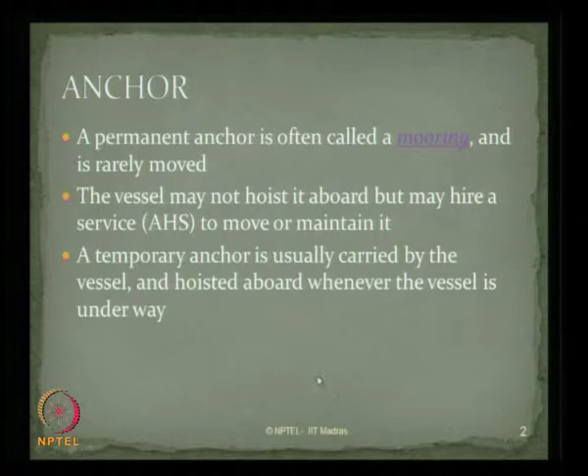First, what is an anchor? A permanent anchor is often called a mooring and is rarely moved, it is more or less fixed to a specific position. The vessel may not hoist it aboard, but may hire a service to move or maintain it. A temporary anchor is usually carried by the vessel and hoisted aboard whenever the vessel is underway. This is what most non-sailors mean when they refer to an anchor.

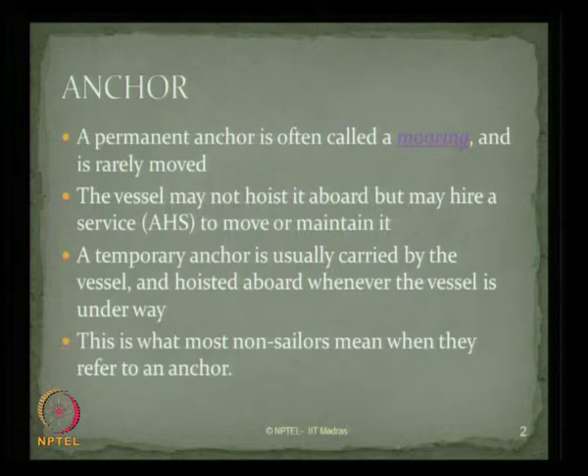Where are these anchors used? Anchors are used in water depths exceeding 1500 meters.

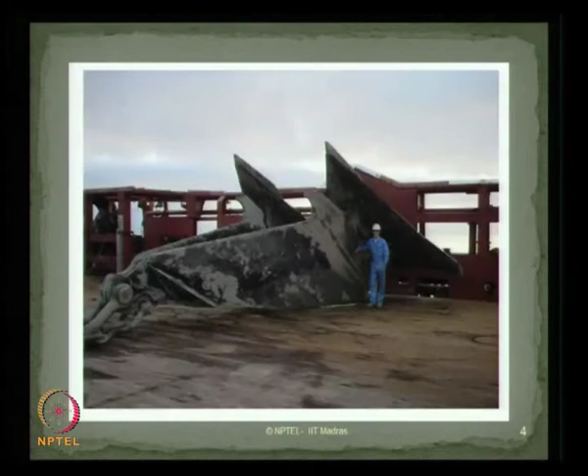This is a typical photograph of an anchor. It shows the proportionate size in terms of dimension, length, thickness and material compared to a human figure. You can see an anchor is a very large structural component which holds down the vessel in position as a restraint.

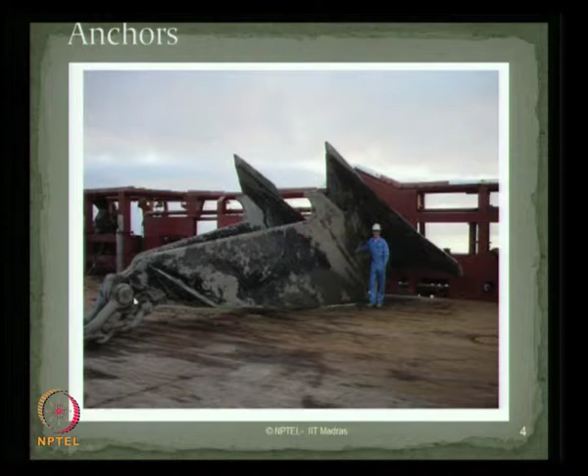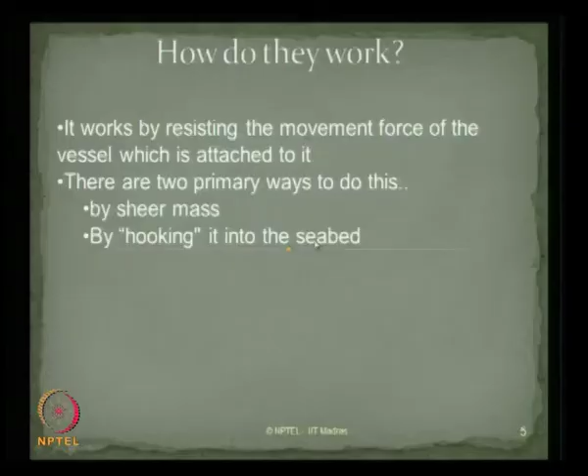How do they work? It works by resisting the movement forces of the vessel to which it is attached. There are two primary ways to do this. One is by having a sheer mass, a massive element which can hold down the vessel in position. By increasing the mass of an anchor, it may not allow the vessel to move. The second option is to hook it down to the seabed by some arrangement, holding it down by hooking it, or creating a massive attachment to the bottom such that the vessel does not move.

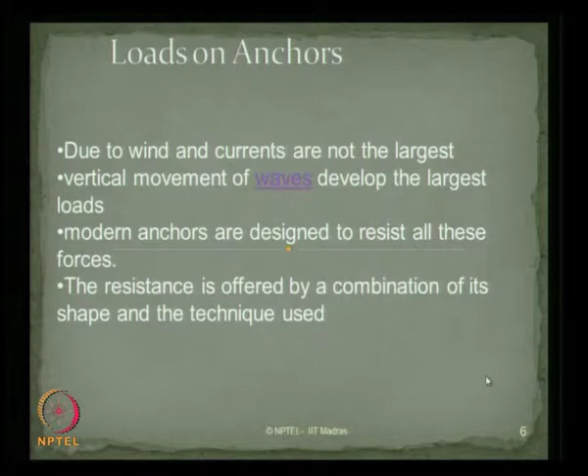What are the different kinds of loads coming on anchors? Due to winds and currents, the forces coming on anchors are not the largest. The vertical movements of waves develop the largest loads possible on anchors. Modern anchors are designed to resist all these forces. The resistance offered by an anchor is essentially a combination of the shape and the technique used to anchor it to the seabed.

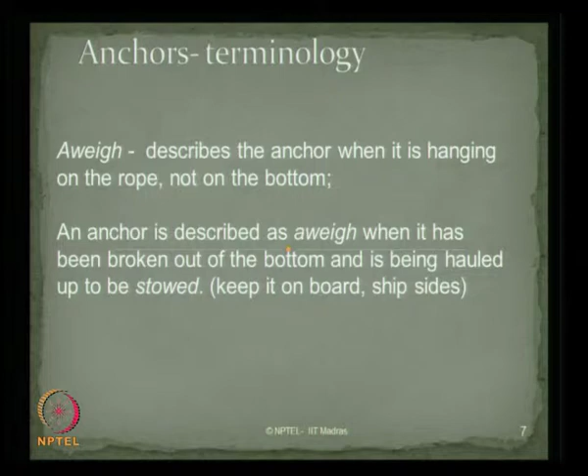There are different terminologies used for seabed anchors. 'Aweigh' is one of the important terms commonly referred to. Aweigh describes the anchor when it is hanging on a rope and not on the bottom. An anchor is described as aweigh when it has been broken out of the bottom and is being hauled up to the stowed area, so it can be kept on board on the sides of the ship.

Two photographs show different views of an anchor which are essentially temporary anchors. These are called fluke style anchors, one of the temporary types generally used. A central bar is called the shank. An armature with two large flat surfaces is called the flukes. So this type of anchor is what we call a fluke style anchor.

The flukes have a sharp tip at the end, so that they can penetrate down into the seabed for holding it in position. The shank is attached to the fluke by means of a hinged arrangement, and this point is called the crown, where the shank and the armature are attached together. The stock at the crown is hinged so the flukes can move or rotate, allowing it to be positioned for anchoring the object it is connected to. This shank is connected to the object by means of a steel chain or a wire.

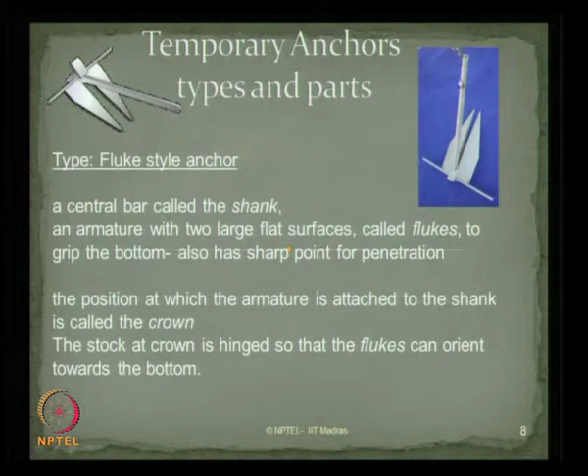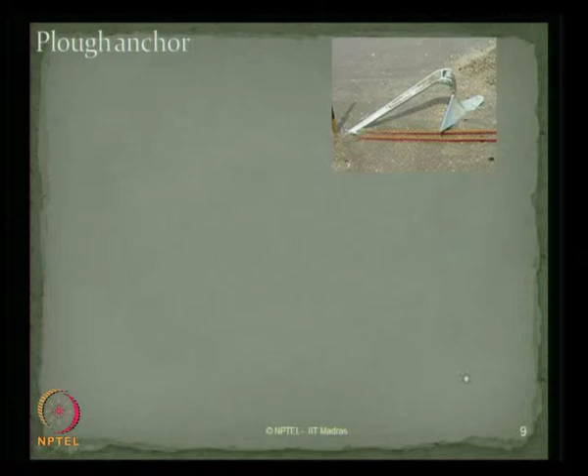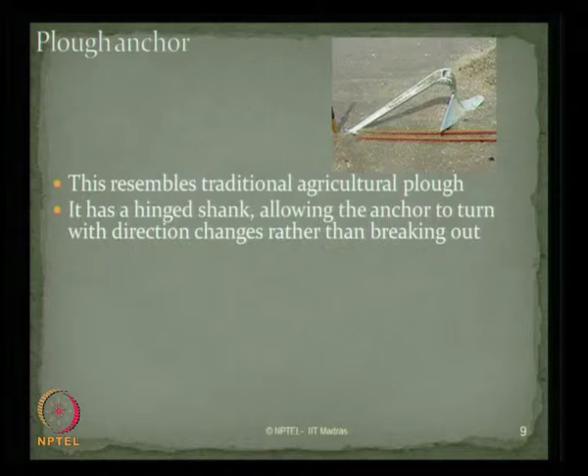The other type of anchor is called a plough anchor, as seen in this photograph. It is typically similar to the plough used in agricultural fields, resembling a traditional agricultural plough. It also has a hinged shank, allowing the anchor to turn with direction changes rather than breaking when the direction is changed. The hinge enables the plough component to turn its direction and position when the anchor is being used for holding it in position.

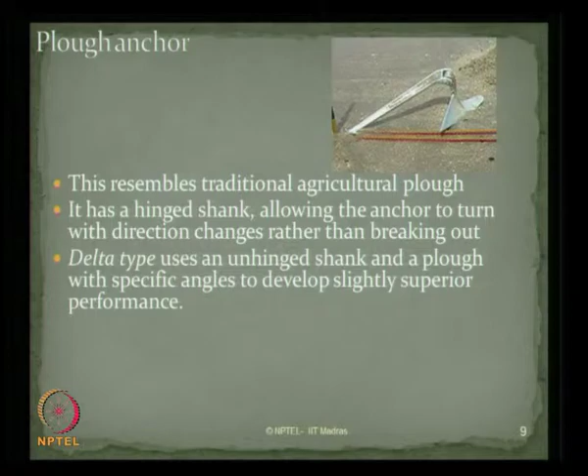The delta type uses an unhinged shank. Sometimes unhinged shanks are available with a plough manufactured at a specific angle, and there is no hinge, because there is always a probability of the anchor breaking exactly at the hinged point, which is the weakest connection in a given anchor. Owing to the use of lead or tip weight, the plough is heavier than average for the amount of resistance developed. The plough has a very massive element which can hold the shank at a specific location and cannot be pulled out easily when placed in position.

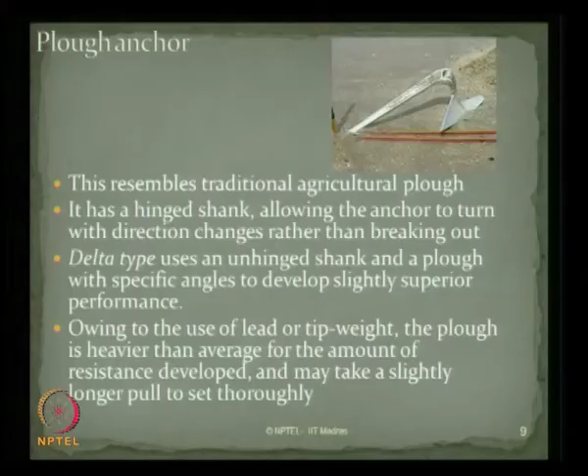The next type of anchor you see in the picture is the Bruce and claw type. You can see this is the claw and this is the Bruce. So, Bruce and claw type.

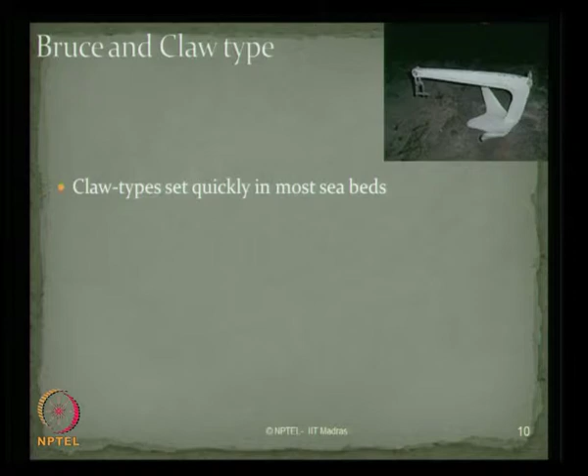Claw types set quickly in most seabeds because of their geometric arrangement. This is one of the convenient ways of holding down the object in position. They do not break with tides or wind changes; they slowly turn at the bottom to align with the forces.

Claw types have difficulty in penetrating because the sharp edge is not the same as that of a plough type, so this has certain difficulty penetrating the seabed, but of course it holds rigidly in position and can be suitably used for many types of sea bottom.

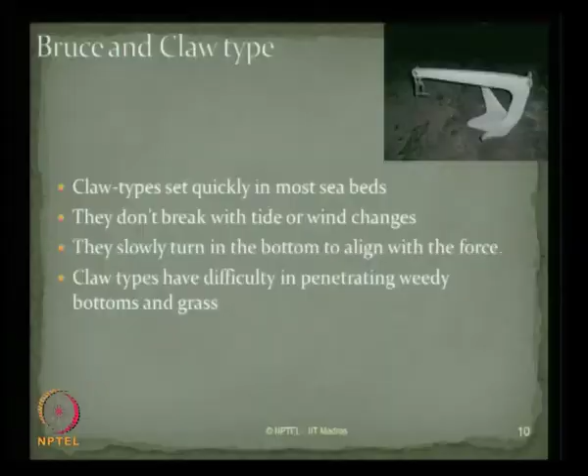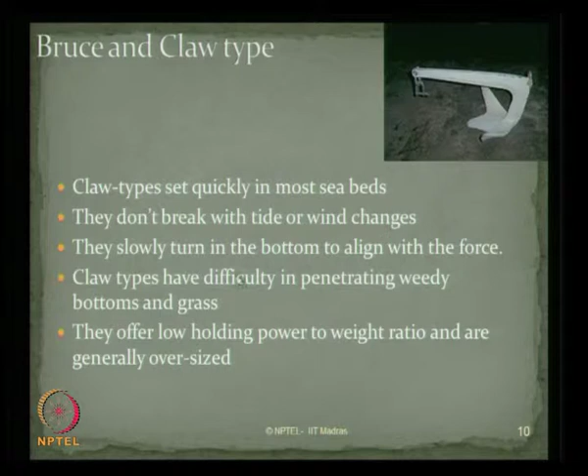Essentially, when you have large or intensive vegetation in the sea bottom, this kind of anchor can be conveniently used. Bruce and claw type is that kind of anchor we talk about. They offer low holding power - the holding power or pulling capacity of this anchor compared to its weight is lower, and therefore they are generally oversized.

The other type you see here is permanent anchors. What you saw in the previous slides were all temporary anchors. The ones you see now are all permanent anchors.

The first of its kind is what we call mushroom anchors. It is shaped like an inverted umbrella or a mushroom. The head is buried in the silt to hold the vessel in a permanent position. It is suitable for seabeds composed of silt or fine sand.

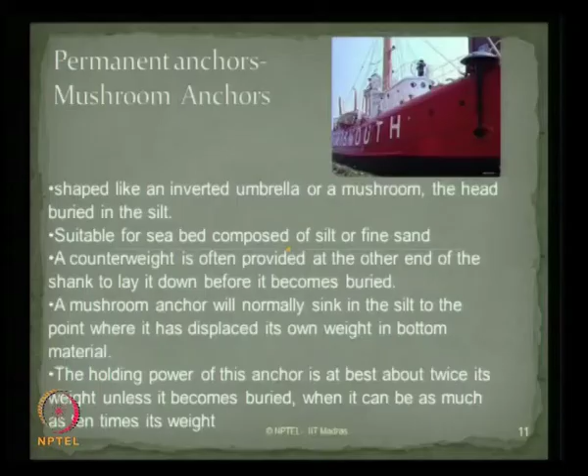There are other kinds of anchors called dead weight anchors. They rely solely on their heavy weight. It is usually just like a large block of concrete or a huge massive stone.

Its holding power is equal to its weight underwater, taking buoyancy into account, regardless of the type of seabed. It can be used in any kind of seabed surface, whether rough, with vegetation, etc. Consequently, dead weight anchors are used where mushroom anchors are not suitable.

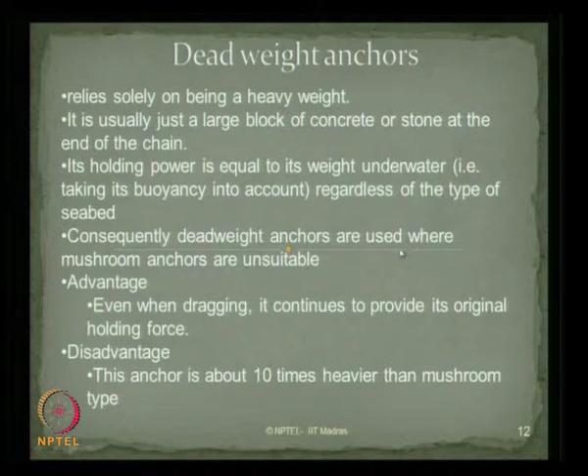There are salient advantages of this kind of anchor. Even when dragging, it continues to provide its original holding force - that is an advantage. Whereas one important demerit is the anchor is about 10 times heavier than the mushroom type. So you are unnecessarily carrying this kind of heavily placed anchor on board, whereas mushroom type anchors can be an alternative to this, but of course mushroom type anchors cannot be suitable for all kinds of seabed surface.

When we talk about anchoring, let us ask 4 primary questions which we must consider before we select any specific type of anchoring. Is the anchorage protected? You must check whether the anchorage system you are using is completely protected from the lateral forces.

Is the seabed having good holding ground? Do you have a seabed made of silt, sand, enough vegetation, or rocky, etc.? Because depending upon the surface of the seabed, you must select the specific type of anchor.

Then of course you should consider what is the depth at which you are thinking of anchoring it, what is the tidal range, and what is the current tide state at that specific location, and whether there is enough room for variability of all these values during the anchoring process. So we must answer all these primary questions first before we select any specific type of anchor.

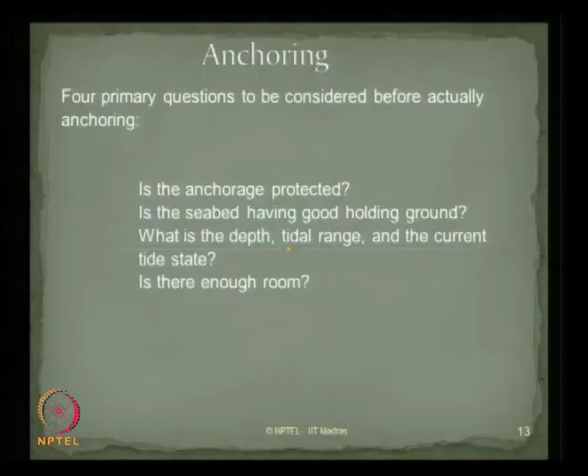Now let us elaborate these questions in detail. Is the anchorage protected? A good anchorage offers good protection from the current weather conditions and will also offer good protection from the expected weather conditions.

The second question to be elaborated is whether the seabed has good holding ground. It depends on the nature of the seabed. Collect a sample from the seabed bottom and examine it. What kind of material is it? Is it a rocky bottom? You must examine it physically as well as by taking samples, to see what kind of anchor is suitable for this kind of seabed.

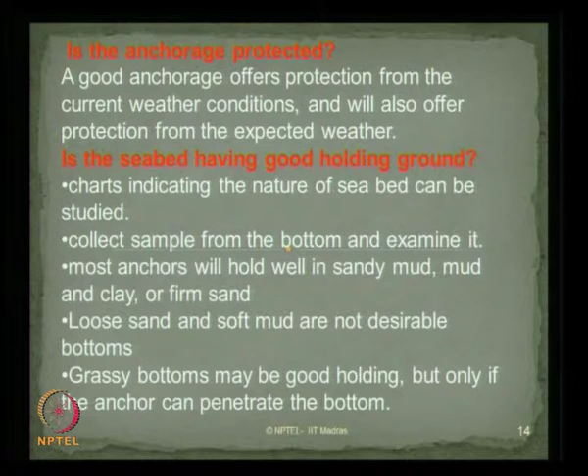Most anchors will hold well in sandy mud, clay or firm sand. Loose sand and soft mud are not desirable for many of them. If you have strong vegetation at the bottom, some types of anchors may have very good holding capacity, but only when the anchor can penetrate to a greater depth at the bottom.

The next question is, what is the depth at which you are planning to anchor? Consider the depth, the tidal range and the current state. If your anchorage is affected by tidal variation, you must know the tidal range and the times of high and low water tides at that specific site. You must also have a good idea of the enough depth available for a vessel and the draft at which your vessel should float throughout the range as it is being pushed and restrained by the anchors.

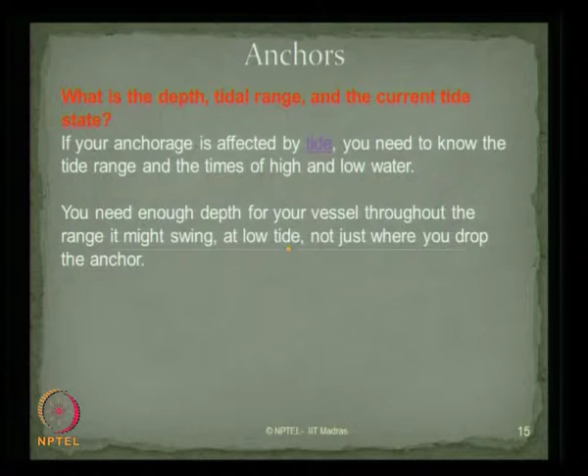We also talk about the different holding conditions for anchorage. Whatever the anchor type, optimum holding depends on several conditions. The foremost condition is that the flukes, the pointed edge blades, must be completely and symmetrically buried in the bottom.

If you do not have symmetric holding of the anchor, this may result in unnecessary lateral displacement of the vessel during high tide or low tide operations. Therefore you must ensure the flukes are held down symmetrically and completely penetrated in the sea bottom. The second condition is that if the fluke and the shank are hinged together, what we call articulation, then the articulation must be kept in an open position, so the angle of rotation of the fluke can adjust itself depending on the lateral forces acting on the anchor.

Another condition to examine when selecting an anchor is that the tension on the pulling eye of the shank must be more or less parallel to the seabed. Do not try to place the anchor so that the shank remains almost perpendicular to the seabed. This may result in very little holding power, and the anchor may get pulled off the seabed even for very small lateral forces.

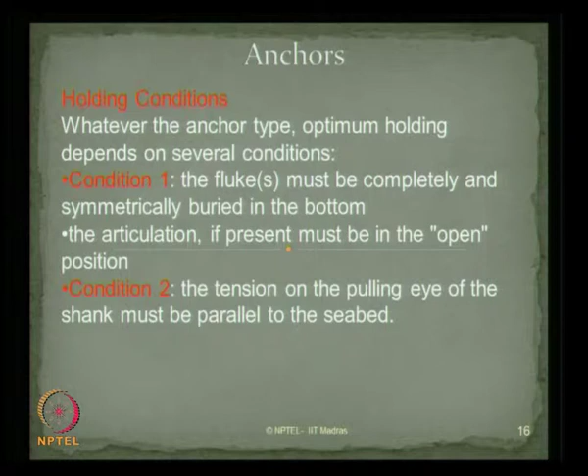Now let us see some pictures showing good settings and bad settings. As I told you, in the case of sand or silty clay etc., the shaft should be almost parallel to the seabed to ensure good holding power.

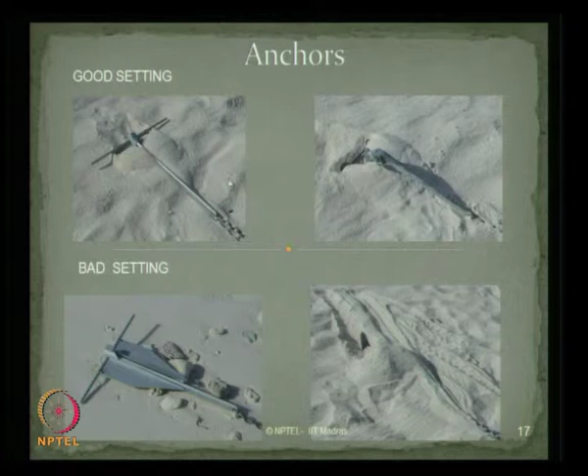But if the flukes are not completely embedded as you see here, or even if the shank is completely covered as you see here, there is no holding power available. Therefore these are what we call bad settings, and these are what we call good settings for an anchor.

The foremost question also comes into play: do we have enough room to make any adjustments? If your anchorage is affected by tides, you should keep in mind the swing range of the tide, which will be larger at low tide than at high tide. No matter where you anchor, you must consider the largest possible swing range at that specific location.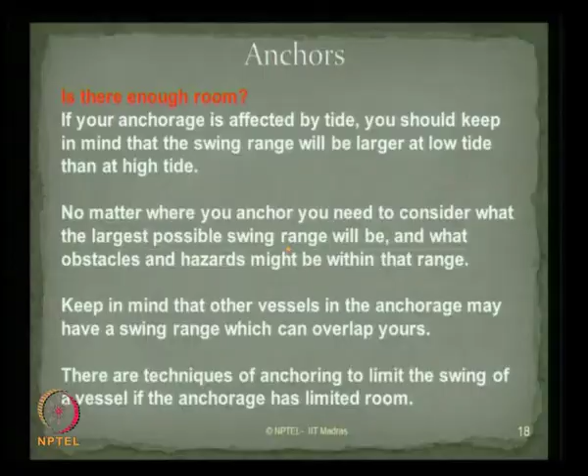Keep in mind that other vessels in anchorage may also have a swinging range, so your anchor's swing should not overlap with other neighboring vessels nearby. There are many techniques of anchoring to limit the swinging of an anchor or vessel, that is what we call enough room available for swinging the anchor. But one must ensure these four conditions are satisfied. These questions must be answered primarily before selecting the type of anchor and the method of anchoring for a specific site.

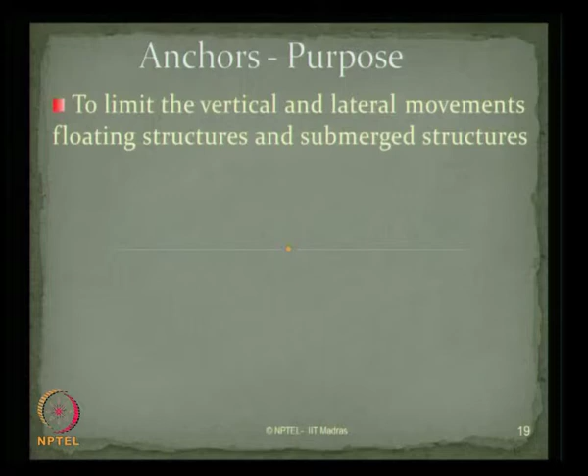Now let us quickly see what are the different purposes, or the main purpose why we anchor a vessel. The vessel is actually anchored to limit the vertical and lateral movements of floating structures, and of course in case of submerged vessels as well.

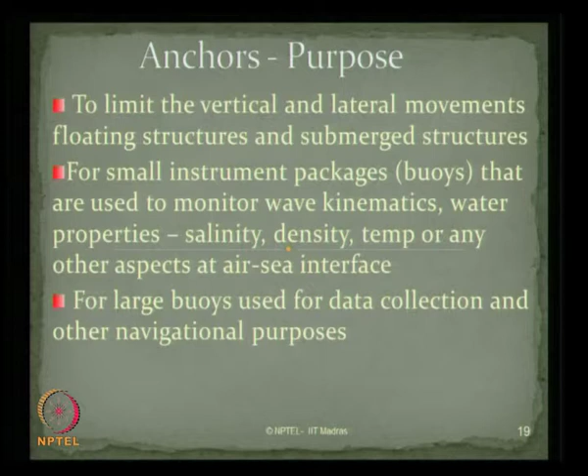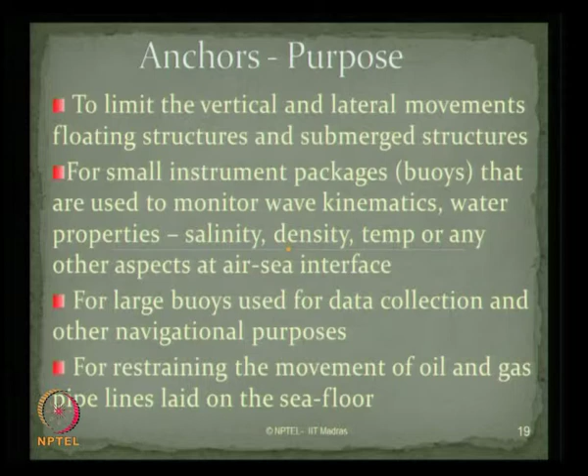For large buoys used for data collection and other navigational purposes, you may also require to anchor them to the seabed. So there are varieties of purposes why we use seabed anchors, as you see in this slide. Essentially, for restraining the movement of oil and gas pipelines on the sea floor, we do anchor them to the seabed.

Now figure 1 shows a catenary mooring and figure 2 shows a taut leg mooring. These are different arrangements of anchoring, and you will see in both arrangements that the shank is almost parallel to the seabed where the anchorage is being generated.

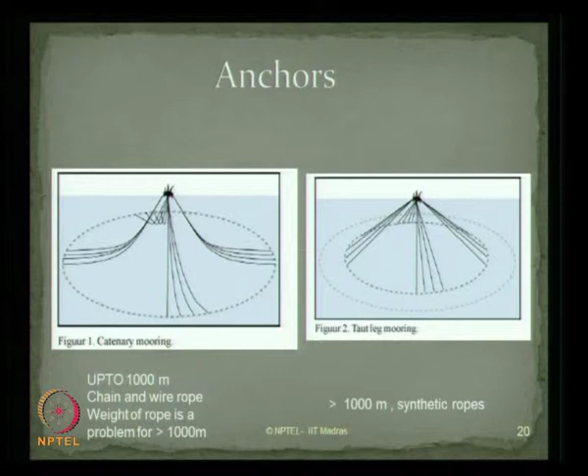The catenary mooring is applied to a maximum depth of about 1000 meters, using chain and wire rope. The weight of the rope is actually a major problem when you go for deep anchorage more than 1000 meters. So in that case, one recommends synthetic ropes to be used instead of steel chains or steel wires.

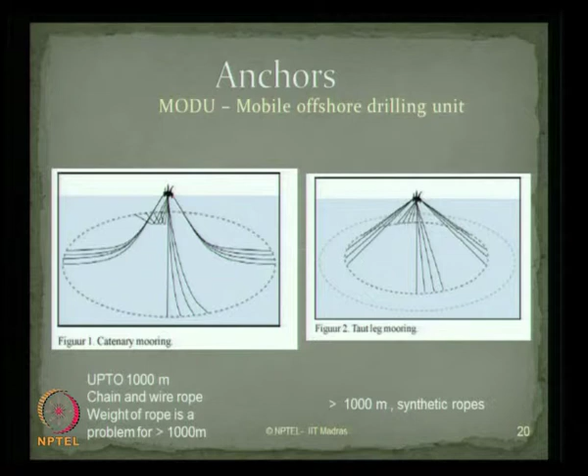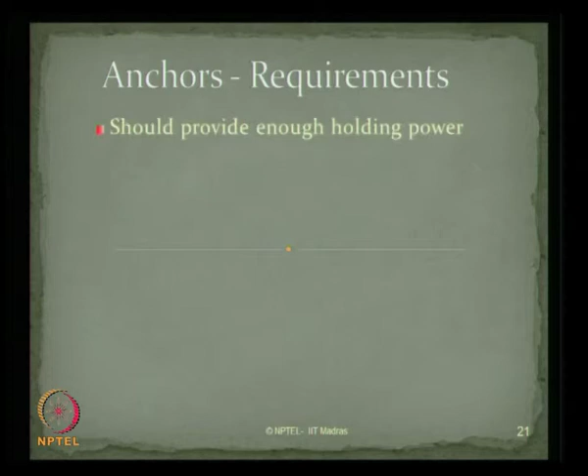Essentially these are two arrangements of anchoring systems used for mobile offshore drilling units and FPSOs. Let us see what are the functional and design requirements of anchors. Anchors should of course hold enough holding power, have a minimum size and weight, and be easy to handle.

The predominant forces influencing the design of anchors are the nature of the seabed, the bottom slope of the seabed, and the direction and intensity of the mooring line tension.

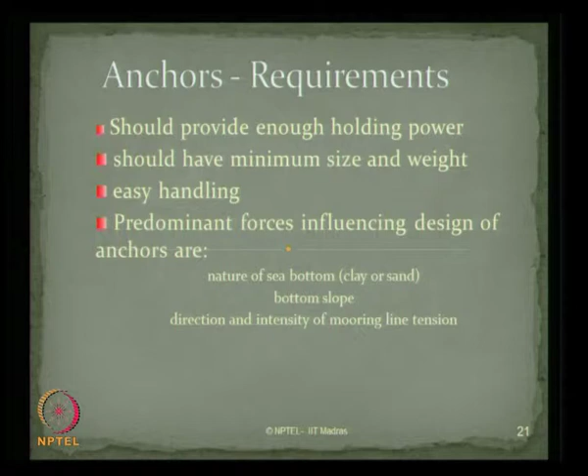The length of the cable should be apt and optimum. It should not be longer or shorter, because a shorter cable will result in the lifting up of the shank, while a longer one will result in unnecessary dragging of the anchor.

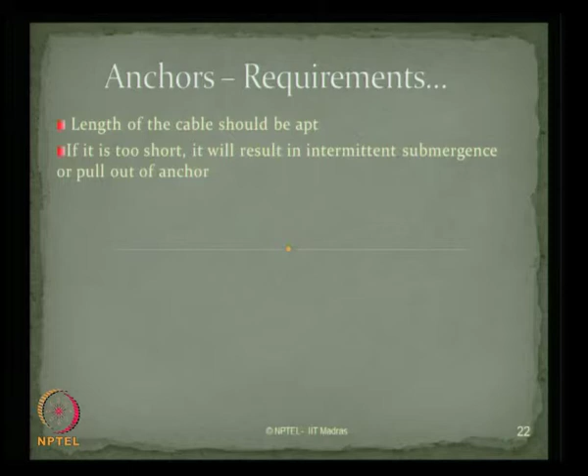If it is too short, it will also result in intermittent submergence, or essentially land up in pull out of the anchors. If it is too long, it shall permit excessive movement, which will also be a problem for maneuvering or sea keeping of the vessels.

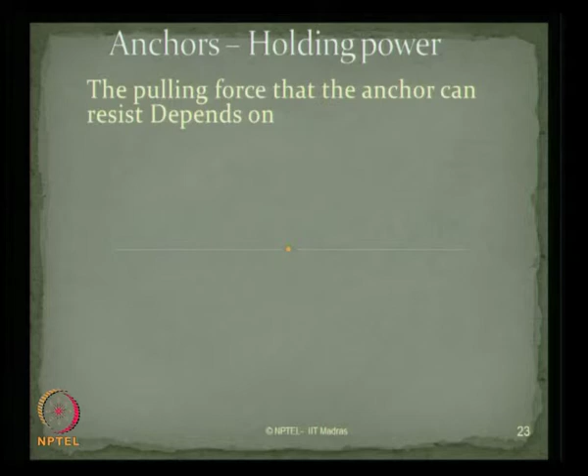If you want to calculate the holding power of an anchor, essentially the holding power refers to the pulling force that the anchor should resist, and it depends on the depth of embedment, the submerged weight of the anchor, and the angle at which the cable makes with the sea bottom. Soil properties also play an important role.

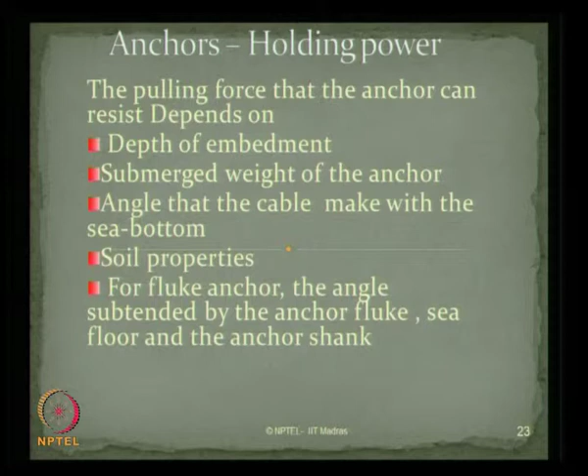In case of fluke anchors, the angle subtended by the anchor with respect to the seabed and the anchor shank is a very important parameter which will decide the holding power of an anchor.

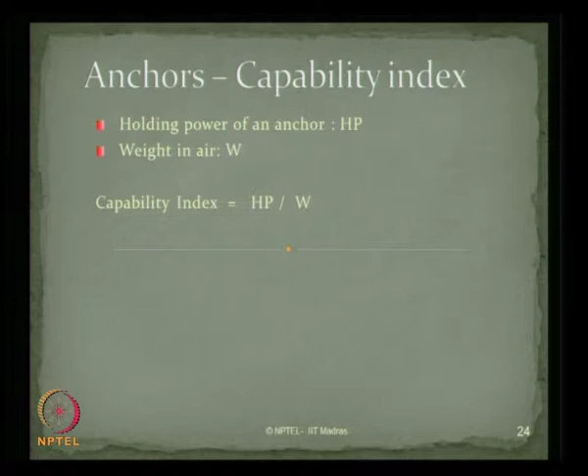Anchors also have something called a capability index, which relates to the holding power of an anchor. If the weight of the anchor, W, is measured in air, then the capability index is nothing but HP by W, that is, holding power to the weight of the anchor in air. This is what we call the capability index.

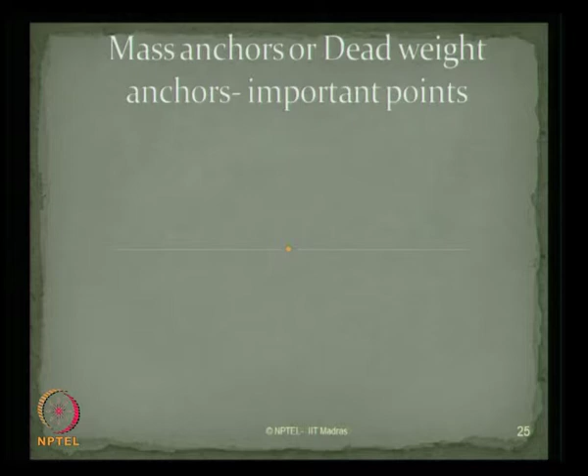Let us speak about mass anchors or deadweight anchors. There are some salient points related to deadweight anchors. Deadweight anchors have excellent resistance to vertical pull.

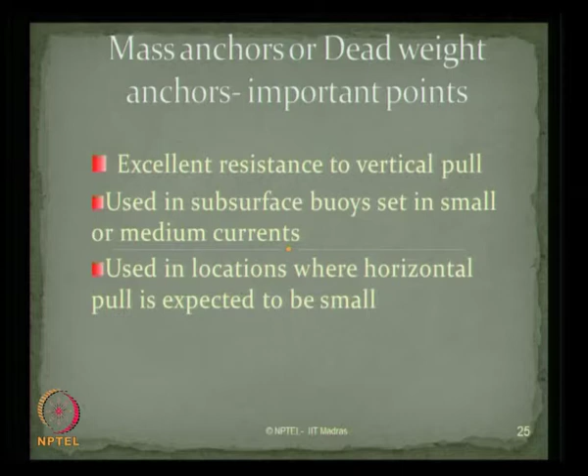They are used in subsurface buoys that are set in medium or small currents. They can be used in locations where the horizontal pull is expected to be small.

The mass anchor's holding power can be computed, and it depends on the cohesive nature of the soil, the adhesion between the contact of the anchor and the sea floor.

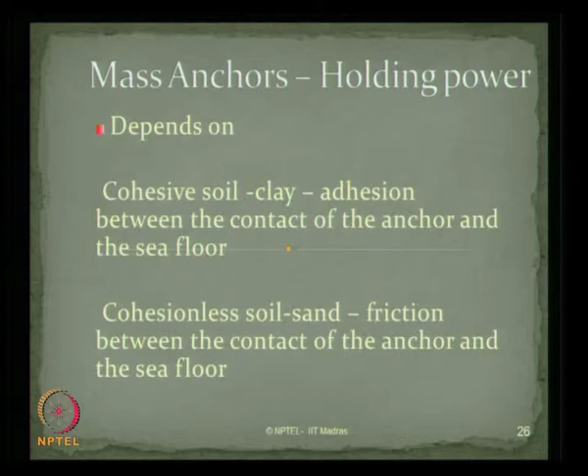If you have a cohesionless soil, like for example sand, then the friction between the contact of the anchor and the sea floor plays a major role in determining the holding power of such anchors.

Talking about mass anchors, the anchor's weight is required to resist the anticipated mooring tension, and it is inversely proportional to the coefficient of friction.

For the same tension T, more friction means less anchor weight is needed. For the same T, less friction means more anchor weight is needed.

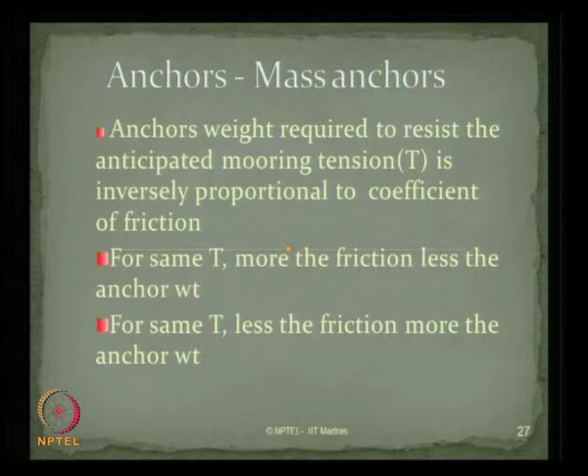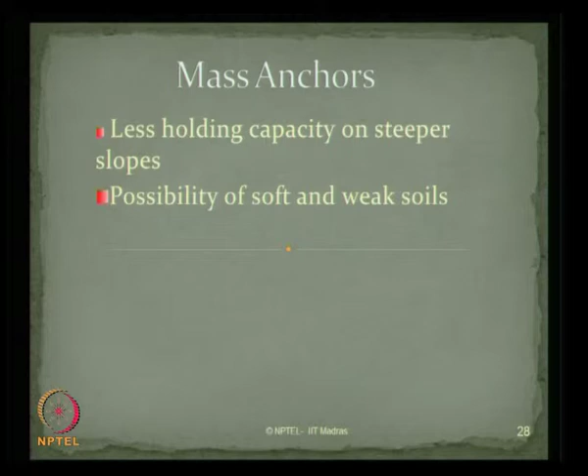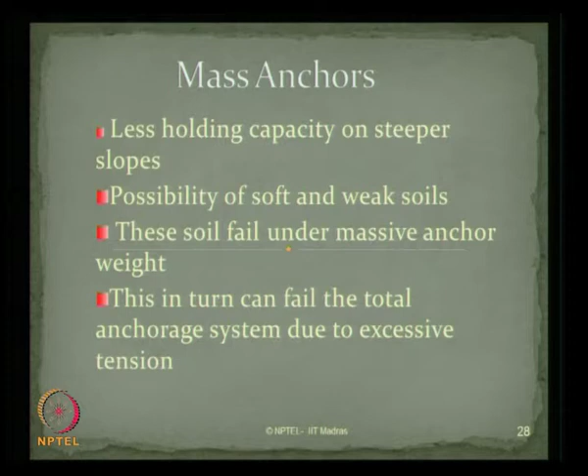If we talk about mass anchors, less holding capacity on steeper slopes is a major problem with mass anchors. There is a possibility of using them in soft and weak soils, but these soils fail under massive anchor weight. This in turn can fail the total anchorage system, due to excessive tension caused in the cable as the failure of the mass anchors occurs in these types of soft and weak soil.

If you look at the application of mass anchors in detail, on soils which are not very weak and soft, you can use mass anchors. Tension should be essentially vertical, so your cable should not be very long, so the tension applied at the point of contact to the anchor shaft should not be horizontal, it should remain vertical.

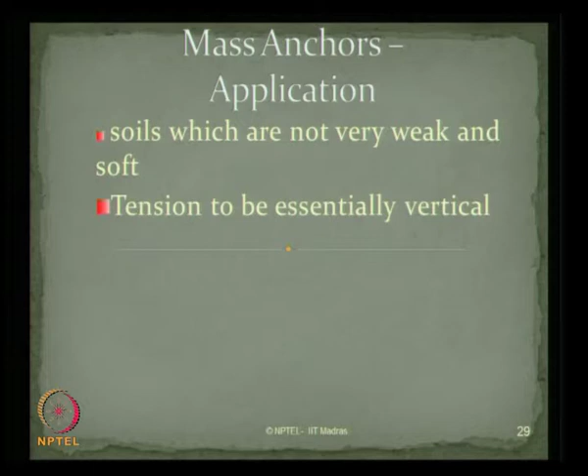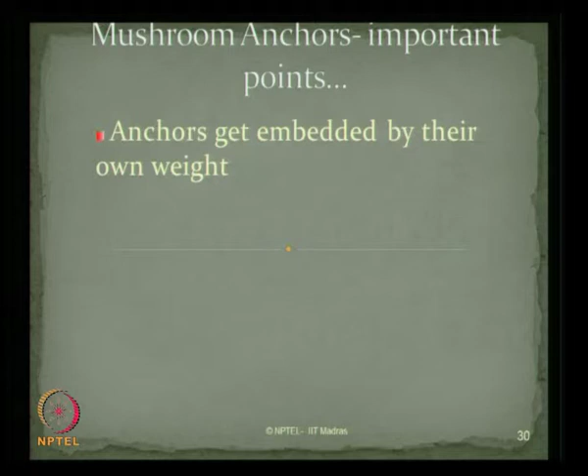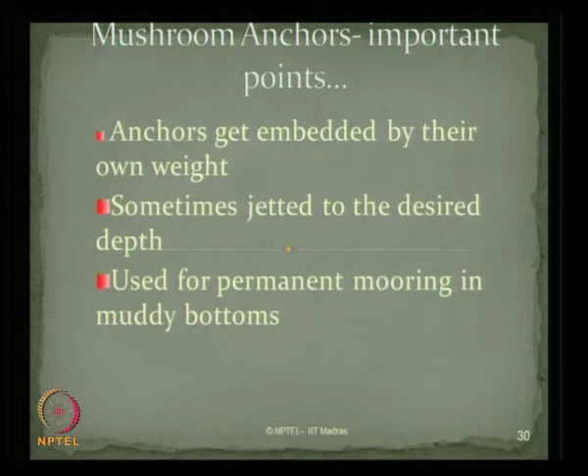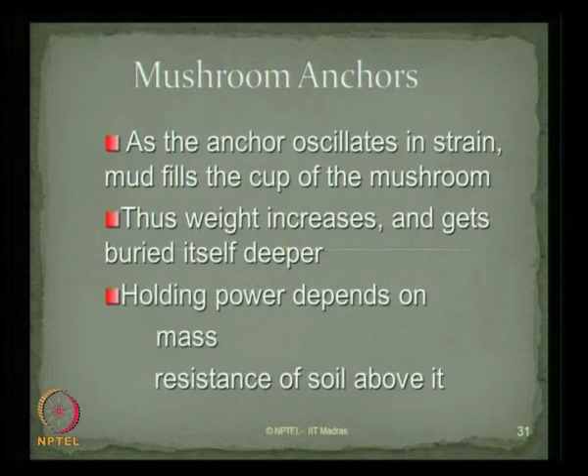If we talk about mushroom anchors, some salient points: mushroom anchors get embedded completely by their own weight, sometimes jetted to the desired depth depending upon site operation. Mushroom anchors are used for permanent mooring in muddy bottoms. As the anchor oscillates in strain, mud fills the cup of the mushroom, and thus the weight increases and it gets buried deeper and deeper. The holding power of this depends on the mass of the anchor and the resistance of the soil above it, on the filled up cup.

Drag anchors, ladies and gentlemen, are another type of permanent anchors which are primarily meant for large ships or vessels. They are designed to dig into the sea floor as they are dragged along by the horizontal force. In this way they get embedded deeply and firmly in the bottom soil.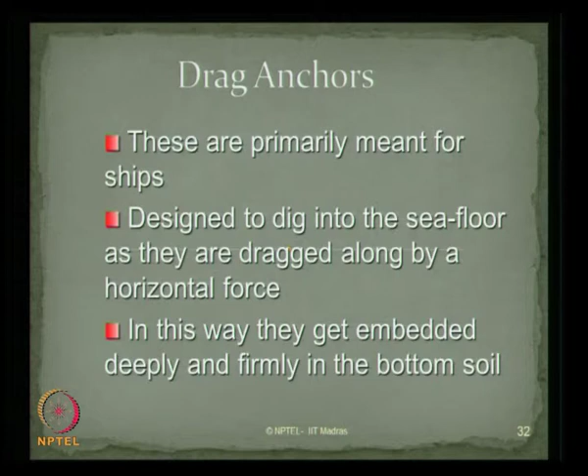Look at the parts of a drag anchor. The drag anchor consists of fluke, stock, crown, shank and a shackle.

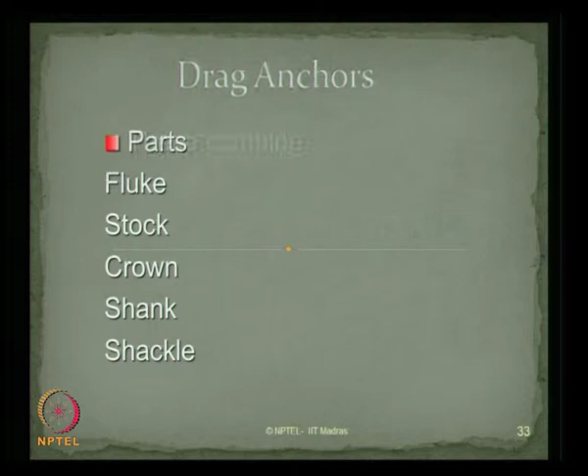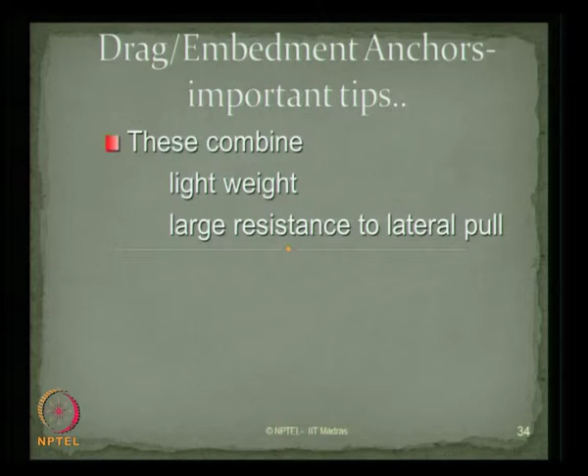Drag anchors, otherwise addressed as embedment anchors, have important points we must remember when selecting these kinds of anchors. They combine light weight with large resistance to lateral pull, which is an advantage for use with large vessels. There are of course a couple of demerits related to embedment anchors: it is necessary to drag the anchor along the bottom before it can dig and hold. It is very important that the drag anchor should be dragged for a certain distance, so that it develops resistance to hold down, or generates holding power, before it is actually used as an anchor.

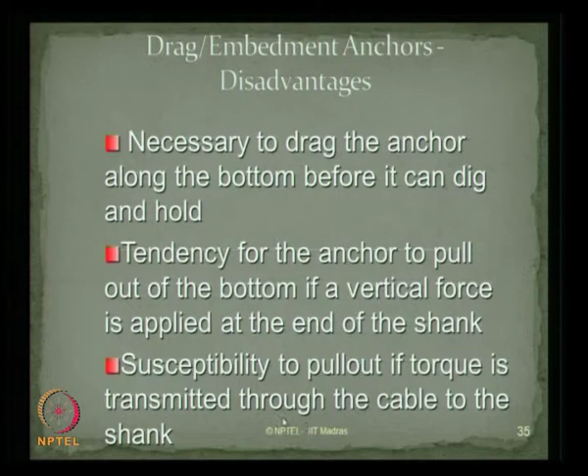It has a tendency to pull out of the bottom if a vertical force is applied at the end of the shank. Remember, ladies and gentlemen, it is very important that they should not have a vertical force applied at the bottom. It also has a susceptibility to pull out if torque is transmitted through the cable to the shank.

These are different layouts of pictures shown for anchors, with the arrangement of different shapes which connect the shank and the fluke. In the process of anchoring to the seabed, in phase 1, when there is no penetration, you pull the shank and the fluke gets adjusted, as they are connected by a hinged connection. There is always a maximum angle beyond which this connection should not be stretched or opened, because this should enable the fluke to get embedded in the soil for proper anchoring. As I told you earlier, the shank should never become vertical, and the opening angle should not be very large.

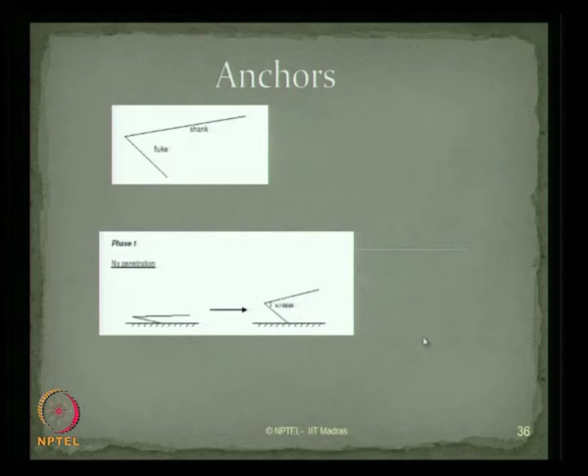The second phase depends on penetration, which causes the fluke forces to resist. As you keep dragging the anchor, the fluke gets embedded, and there is an ideal condition where the hinge sits on the sea bottom. So the complete fluke is totally embedded, and the shank keeps on improving the holding power of the anchor. That is what we call phase 2.

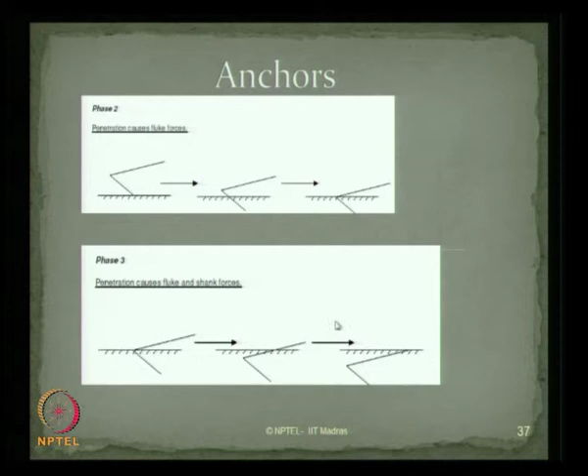In phase 3, as the shank is above and the fluke is completely embedded, you can further drag it, and with further forces applied laterally, even the shank gets embedded completely, and this offers maximum resistance for the holding power of the fluke or the anchor.

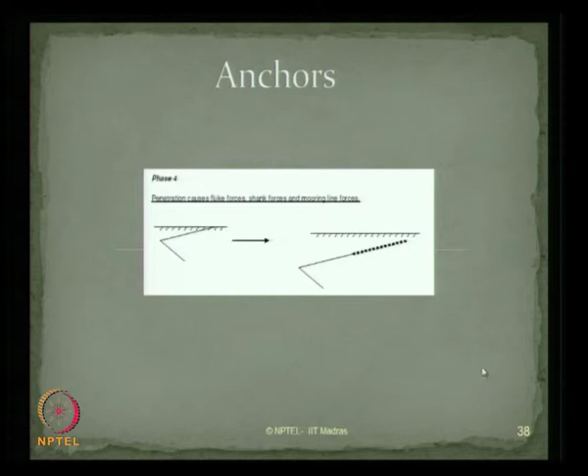In phase 4, as this is completely embedded, even the mooring lines will also offer resistance to the forces applied by waves and wind. There are different kinds of commercial anchors available under different names.

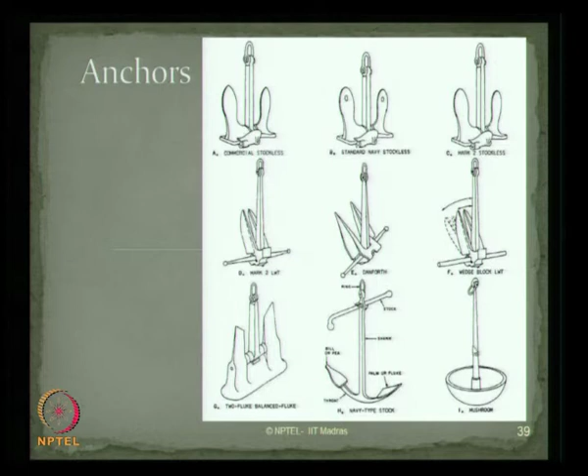As I told you in the beginning, when the fluke is inserted, this cup is filled with mud, and depending upon the soil resistance as this mud fills up, this kind of anchor will offer resistance or generate holding power.

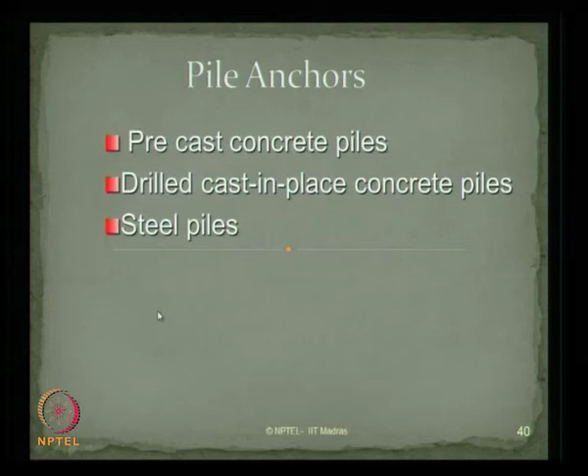You also have something called pile anchors. Pile anchors are used essentially to hold down precast concrete piles. They are drilled cast-in-situ concrete piles. You can also have steel piles in position.

The suction embedded anchor is another type of anchor commonly used for holding down the vessel. To anchor floating exploration and production platforms, this kind of anchor is used. They are best suitable for soft cohesive type soil and are generally used in deep and ultra deep waters. They are installed in water depths varying from 40 meters to 2500 meters. These kinds of anchors have a diameter varying from 3.5 meters to 7 meters. They are really heavy in type, and the penetration is up to a maximum of 20 to 25 meters.

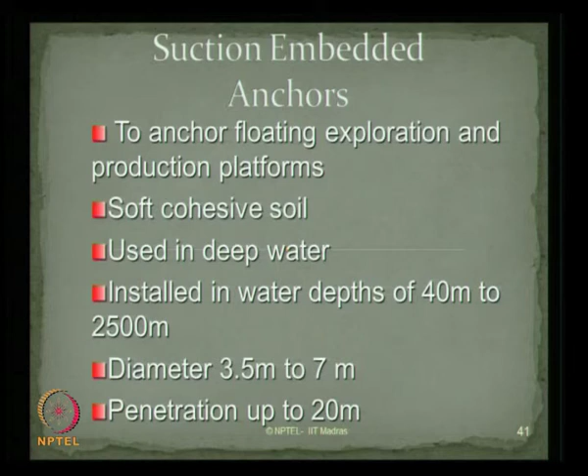A suction caisson anchor has a very large diameter and is cylindrical in shape, can be constructed with either concrete or steel, and has an open end at the bottom and a closed end at the top. The mooring loads are applied by an anchor line attached to the side of the caisson. The length to diameter ratio of this caisson is typically about 6 or lower. Once these kinds of anchors are installed, the caisson acts much like a short rigid pile and is capable of resisting both lateral as well as axial forces acting on it.

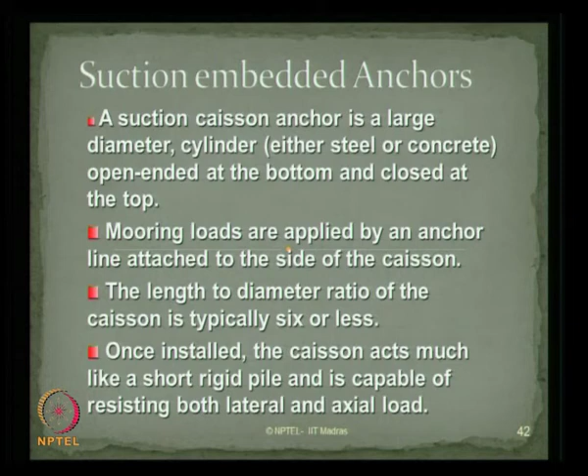The suction caisson gets its name from the fact that it is usually installed by applying under pressure to its interior after it is allowed to penetrate under its own weight. That is why it is called a suction caisson. Since the caisson's interior is sealed from the sea floor by the soil, the vertical loading creates an internal drawdown pressure which in turn mobilizes the end bearing resistance of the soil at the caisson tip.

Of particular interest to operators and contractors is an assessment of the bias and uncertainty in predicting the anchor's installation performance and holding capacity. So there is always an ambiguity in estimating the reliability of these kinds of anchors, or the holding power of these anchors, on every kind of soil bed.

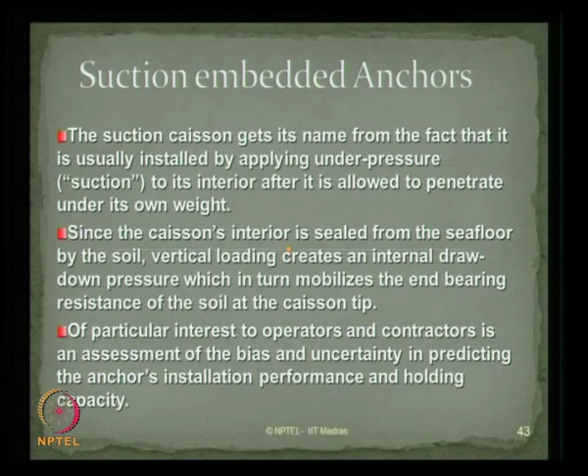Ladies and gentlemen, in this lecture we discussed different foundation systems and different types of anchors, varying from semi-permanent type, temporary type, to permanent type. We have also seen the methodology of operation of an anchor and the method by which an anchor generates holding power. We have also seen different classifications of anchors and their suitability for different types of soil. It all depends upon many parameters. Therefore, you have to answer the principal four questions which we discussed in this lecture before you select any specific type of anchor: depending upon the seabed, depending upon the water depth, depending upon the room for swinging, and of course depending on what kind of vessel you are holding down. Thank you very much.